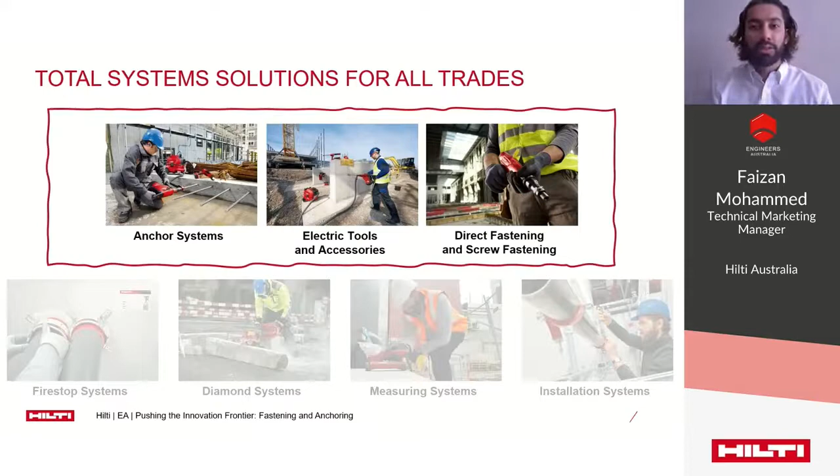The Hilti model is structured to provide an end-to-end partnership from design to installation and maintenance. We support multiple trades with what we refer to as total system solutions for a variety of applications. Today, we will of course be focusing on fastening and anchoring, and the key areas that this relates to are anchor systems, electric tools and accessories, and direct fastening and screw fastening.

Evolution of fastening: whilst it's difficult to pinpoint exactly when the first use of a fastener was, nails used to fasten wooden objects date back to roughly 3400 BC in ancient Egypt. It is thought that the term penny may even originate from medieval England to describe the price of 100 nails.

Until the early 1800s, nails were largely made by hand. During this period, cut nails were made from wrought iron, and about 1860 was when wire nails were introduced. By the 1900s, 90% of all nails were wire nails. Today, we have a variety of nails, produced en masse using coils of metal wiring fed into a machine. But what has changed the most is the equipment that we use to fasten nails.

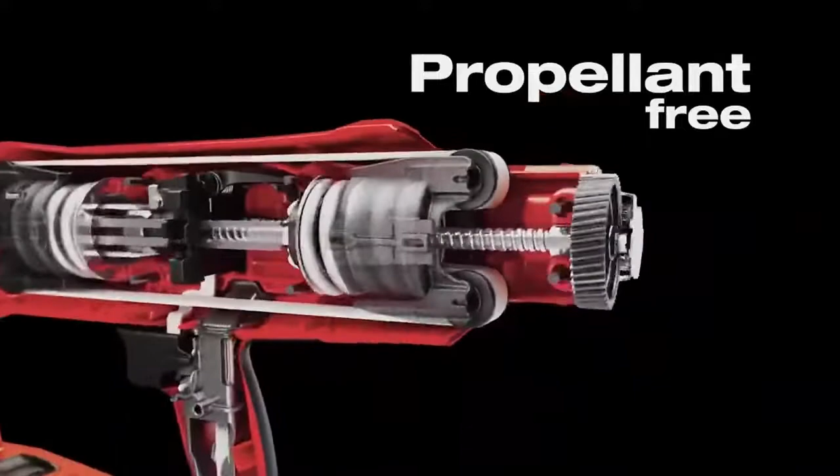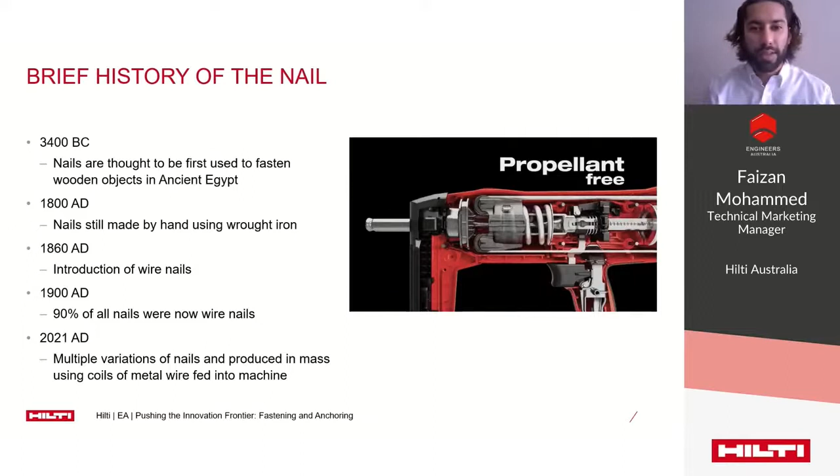The BX3 uses a propellant-free mechanism that exerts low recoil without compromising on fastening quality, achieving a speed of 1.3 nails per second. That's much faster than the traditional hammer.

Screws came later, dating back to 3rd century BC in Greece, where they were commonly used in processing olive oil and grapes. The spiral thread proved effective in producing the necessary force required to perform specific tasks.

Originally, there was no standard to guide the making of screws. Therefore, screws were generally not interchangeable from one application to another, and custom fabrication was required for each specific application.

At around 1800, advancements in technology meant screws were being made more precisely and more quickly. Consequently, the standardization of screw threads became ever important. By the 1860s, the US standard thread was created, and multiple thread designs and forms continued to evolve from there on.

In 1947, the International Organization for Standardization was formed, and one of the first agreed upon international standards was for ISO metric screw threads, whereby the design principles are outlined in ISO 68-1 and characterize each screw thread by M and P. The M designation indicates the nominal outer diameter of the screw thread in millimeters, and P is the pitch, or distance between threads, also expressed in millimeters.

Fast forward to today, we have fasteners of all shapes and sizes, able to take tiny loads of a few hundred newtons, ranging to heavy-duty special anchors like the HDA, which is able to resist loads in excess of 80 kilonewtons. That's 8,000 kilograms, or the equivalent of 8 cars hanging from the ceiling by just one anchor point.

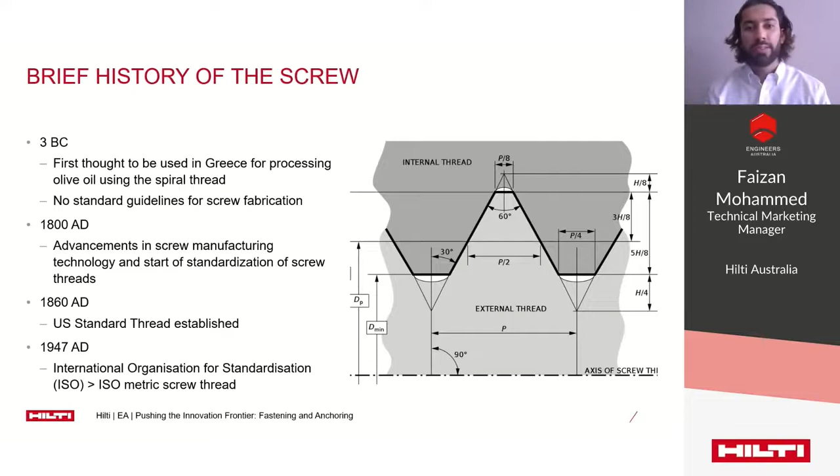So why are fasteners important? Well, buildings are old, and so is the task of connecting building components. Whether structural or non-structural, adequate connection techniques and methods must be utilized to support some of the building's most important components. Put simply, without appropriate fastening, a lot of buildings would just fall down.

This task of connecting building components and members has been handled in different ways and depends on various factors, including building material, required resistance, structural layouts, and other construction requirements.

Traditional joinery in wood construction began with timbers bound with tough natural fibers and the use of interlocking, screws, or doweled joints, amongst other things. Steel construction, which is younger in comparison, has used connections such as cast iron rivets, bolts, and welding, the latter two being the most common today.

Concrete and masonry construction requires other means of fastening and anchoring, and we can explore this further now. Fastening into concrete can be split up into two main types of installation methods. One type is the cast-in installation method, whereby anchoring points can be positioned prior to the concrete pour and then cast in once the concrete is poured.

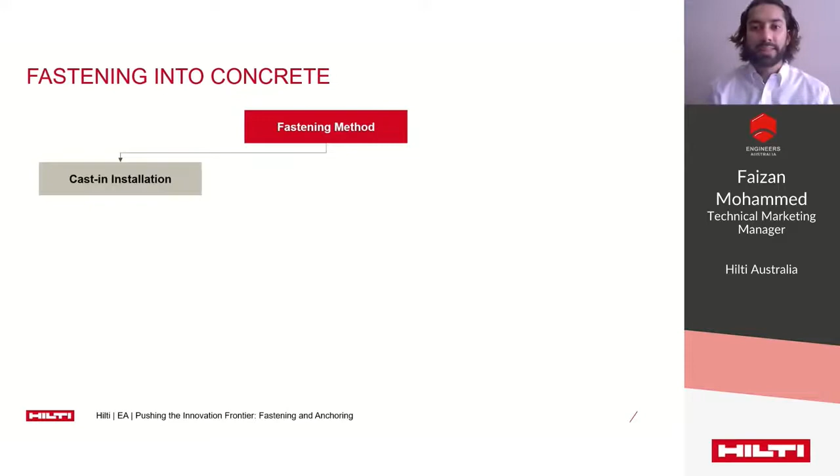Examples include threaded sleeves, channel bars, and headed anchors. Here's what a channel bar looks like. This is an image of the Hilti anchor channel, or HAC.

The other type of installation method is post-install installation. This can be split up further. One type of post-install installation is the drilled installation, which can include anchoring types such as expansion anchors, undercut anchors, bonded anchors, and screw anchors. The HST3 is a type of expansion anchor, and the HY-200-R V3 is used for bonded anchoring.

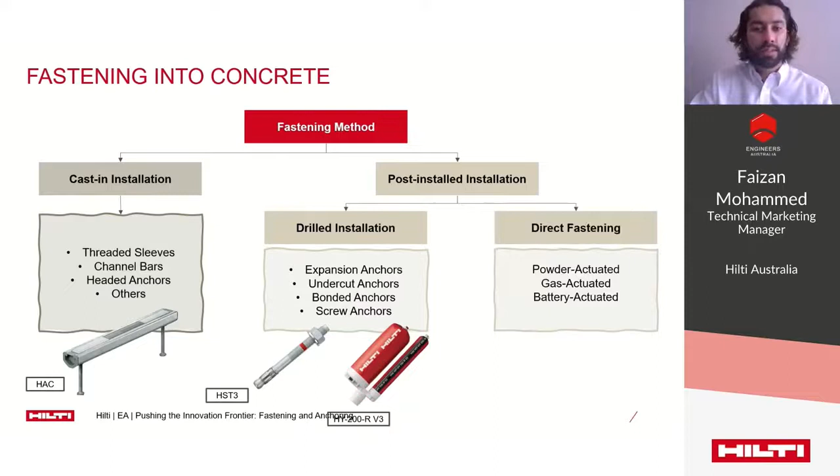The other post-installed fastening method is direct fastening. Examples of direct fastening methods include powder-actuated, gas-actuated, and battery-actuated fastening tools. Here is an example of the DX5, a powder-actuated fastener, and the GX3, a gas-actuated fastener.

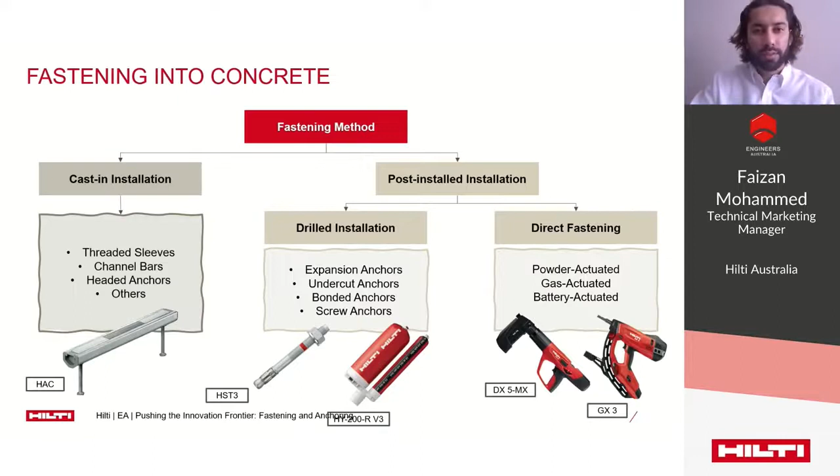So let's dive a little bit deeper into post-installed anchors and their various applications. Post-install anchors enable building components such as steel beams, columns, and brackets to be fixed into existing base material. Some examples include a post to be fixed to concrete, brackets to be fixed into brick, anchoring props for formwork, and doweling into rock.

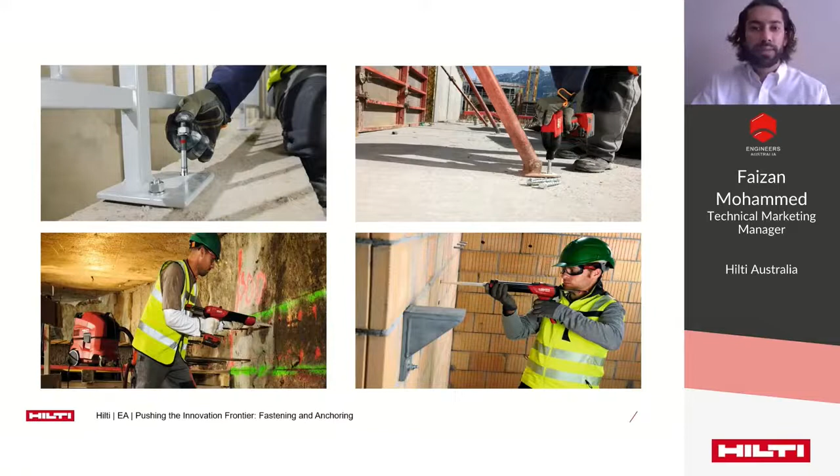The mechanical fastener was the original means of doing these connections. They have been around for over 100 years. With continuous development of these anchoring systems over time, though, we have now got a wide range of anchor types to suit various base materials and applications.

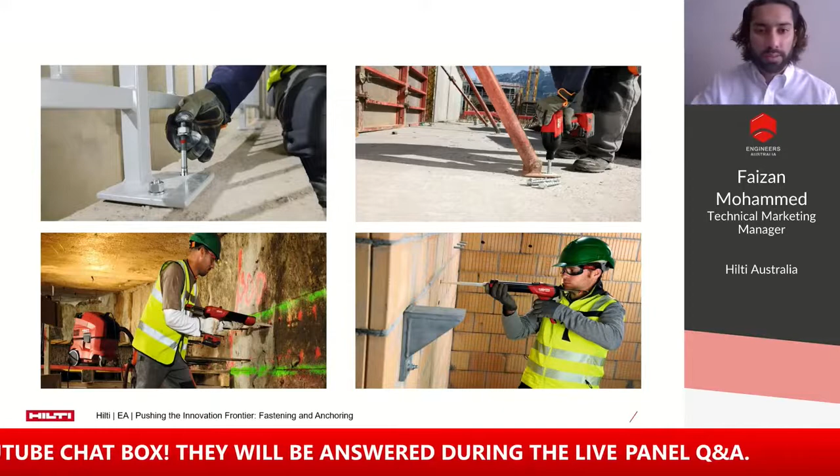Chemical anchoring systems aren't quite as old, being introduced in the market in the 1970s. However, significant investment in research and development has quickly brought them up to speed, and we have today a wide range of state-of-the-art chemical products to suit the full spectrum of base materials and applications.

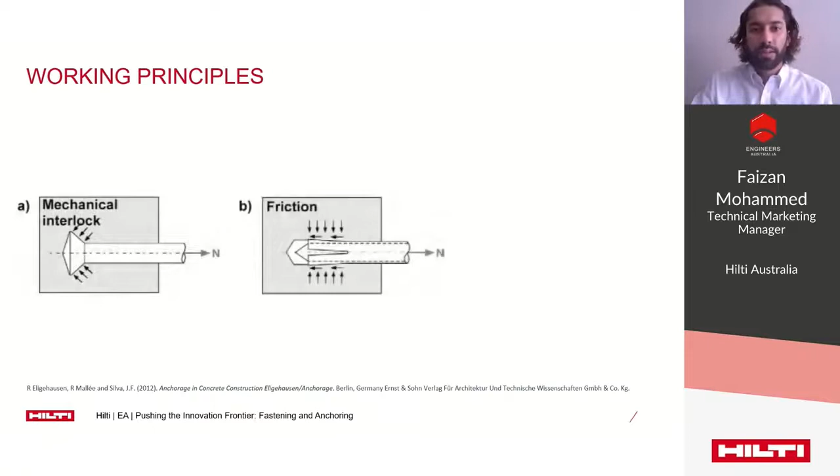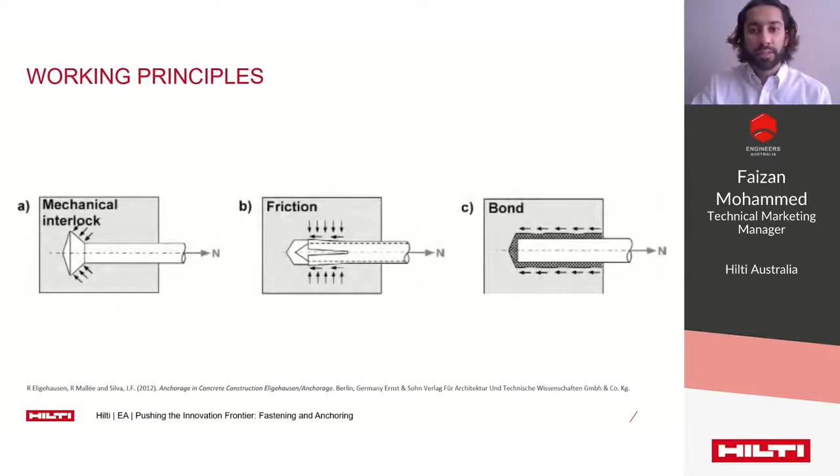To truly appreciate evolution within post-install anchoring systems, it's important to understand the core working principles behind anchor design. There are effectively three different mechanisms or principles an anchor can exercise to maintain fixation once installed. The first is the mechanical interlock, also referred to as keying. The second is the friction hold. Finally, following the more recent introduction of chemical anchoring, an anchor can also be held by creating a bond with the base material. These three working principles, as with any innovation in anchoring, are confined within the boundaries of these principles and the characteristics of the base material.

Let's summarize the different types of anchors and mechanisms. Anchors can be either cast in place or post-installed. Amongst the post-install options, there are mechanical anchors and chemical anchors. With mechanical anchors, they can be further classified depending on their method of transferring load into the base material. The undercut anchor shown here transfers tensile force at the bottom of the drilled hole by direct compression contact, much like a cast-in headed stud. This type of anchor uses a keying effect to create mechanical interlock with the base material.

The mechanical expansion anchor uses friction produced from high expansion forces to resist tensile load. Friction is the most common load transfer mechanism for post-installed mechanical anchors, working by transferring load through friction between the anchor and the wall of the drilled hole in the base material. Anchors that use friction have sleeves which expand during installation. The adhesive anchor, in most cases a threaded rod, transfers tensile force along the entire embedment length. An adhesive bond is created between the anchor rod and the chemical, and from the chemical to the base material. Through this bonding, the load applied to the anchor rod is transferred into the base material through the adhesive.

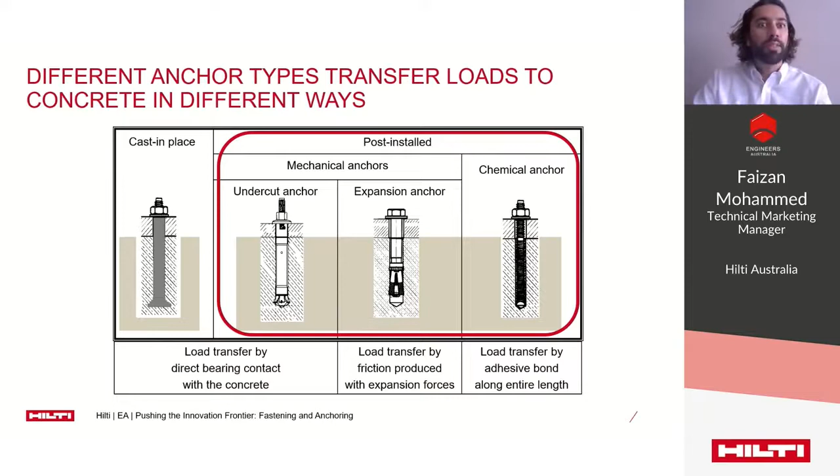Innovations that have changed the fastening industry. Let's take an example of the structural base plate and look at the end-to-end workflow from design to installation through to maintenance, which has a series of steps and activities that may be overlooked at first sight. If we break these up into categories and label the various stages with products, tools, or equipment required, it's clear to see that there is a lot to think about.

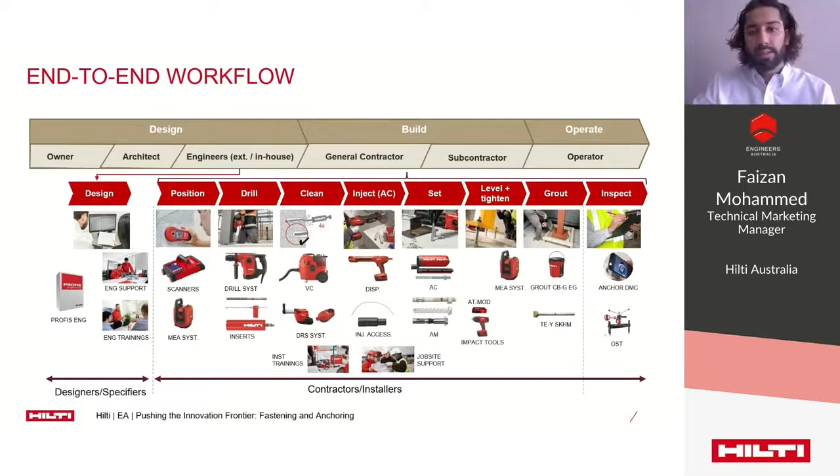The story often starts with the design office, where an engineer will be required to specify an anchor design. During the build stage, the installer will need to identify a safe position for installation and then drill the appropriate holes. They need to clean and prepare each hole, inject or set the specified anchor, level and tighten before grouting, and finally carry out and organize the necessary quality checks such as on-site testing. In the following few slides, I'll go through a few examples of innovative solutions along this workflow.

So let's start with the design office. Our world-renowned and state-of-the-art PROFIS Engineering software was launched 2 years ago in Australia. For the first time ever, designers were able to import loads from the structural design software into Profis and design the complete base plate, including profiles, welds, stiffeners, anchors, and concrete, all on one platform on the cloud.

Furthermore, the added component-based finite element analysis module allowed deeper and more detailed analysis and the ability to see stress distribution visualizations.

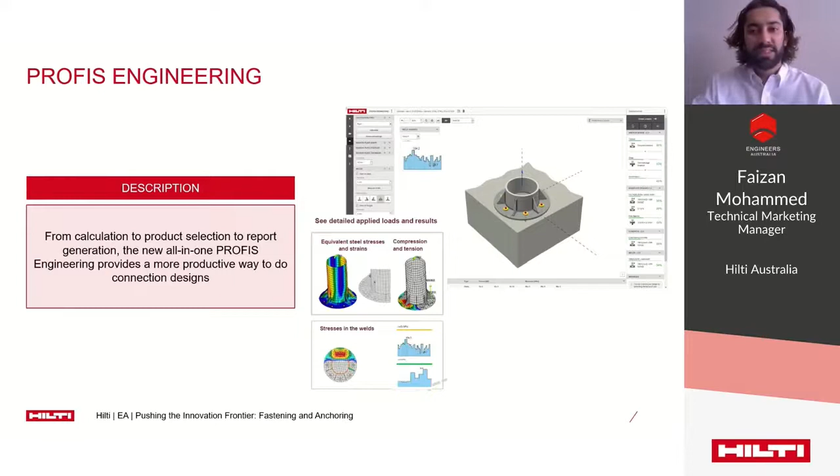Previously, an underlying assumption for the anchor design was to assume that the base plate was sufficiently rigid, and the onus was on the designer to make this judgment. This wasn't necessarily indicative of reality, where base plates can exhibit flexible behaviors. Profis Engineering has changed this and enables a full base plate design inclusive of a flexible base plate assumption.

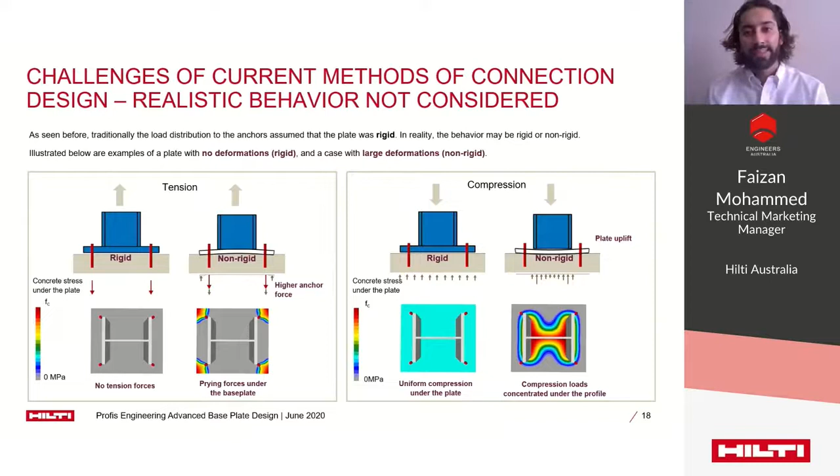Firstly, in tension: when we have a flexible base plate, we can generate prying forces against the concrete at the corner of the plates. This can result in increased anchor loads. Many designers and software take this into account with the addition of prying factors. However, this is often just an approximation or an approximate safety factor used to reduce the pull-out capacity.

In compression, we find we can get a concentration of compression loads underneath the profile using a flexible base plate assumption, as opposed to a uniform distribution of stress as with our rigid base plate assumption.

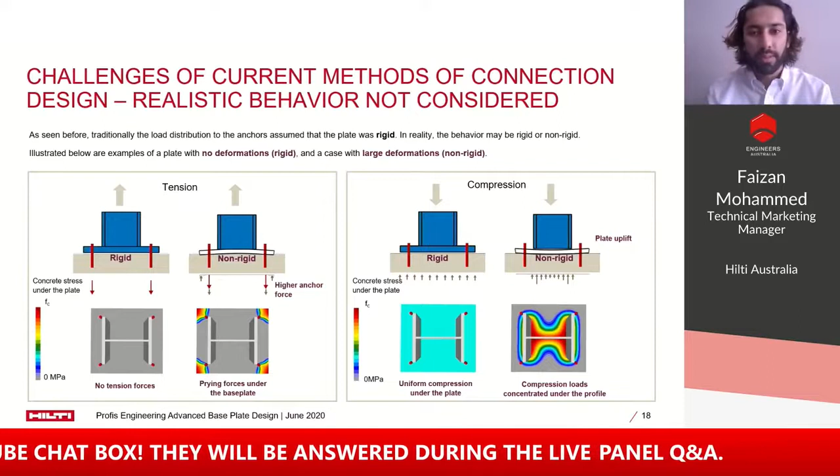Under bending, we can see a combination of tension and compression. We can see prying forces generated at the tension interface of the plate, and we also get a reduction in our lever arm between our tension and compression regions, both of which result in increased anchor forces.

Now, if we want to start looking at the realistic behavior of a connection, we can no longer just consider the anchors and the plate alone. The behavior is affected by all components of the connection, including the profile, stiffeners, the welds, the base plate, the anchors, and the concrete itself.

As mentioned, in order to model the realistic nonlinear behavior of our connections, we can use component-based finite element methods, or CBFEM, which individually models each connection component and connects them all together in the global model.

We model the concrete as compression springs with material properties taken from AS3600. The steel is modeled with 2D quad and tri shell elements with a bilinear stress strain curve. These elements are automatically meshed and automatically refined around the anchor nodes to a refinement level optimized to achieve a convergent solution. This is why the model can be calculated so quickly.

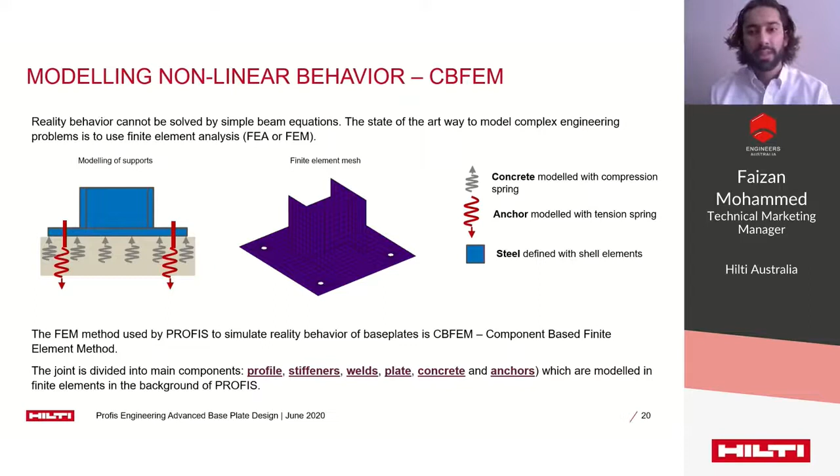The anchors themselves are modeled as bilinear tension springs. The stiffness of the anchors is unique on a per anchor basis and has been determined through hundreds of Hilti's own internal testing to determine this critical data, as the anchor stiffness can have a significant impact on the overall design.

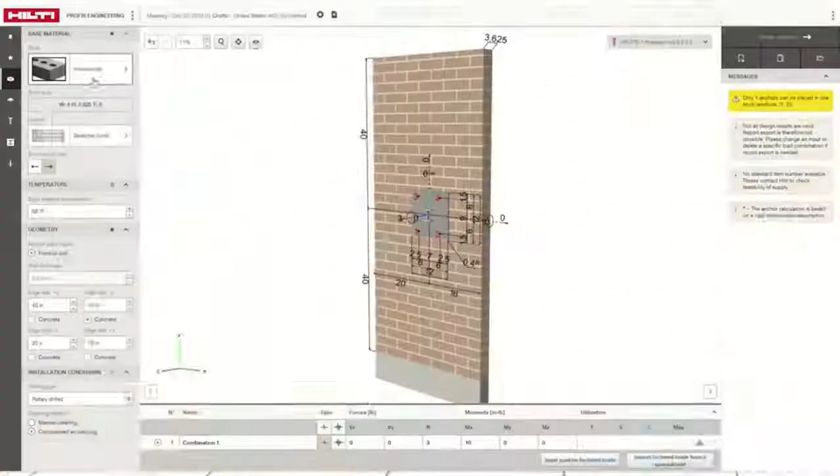One of the big features we added is expanded our base material offerings. We now have concrete, masonry, and concrete over metal deck.

We've also added what we're calling our load engine. This is a set of features that gives you more options to import the loads into the model and design what you really have in the field.

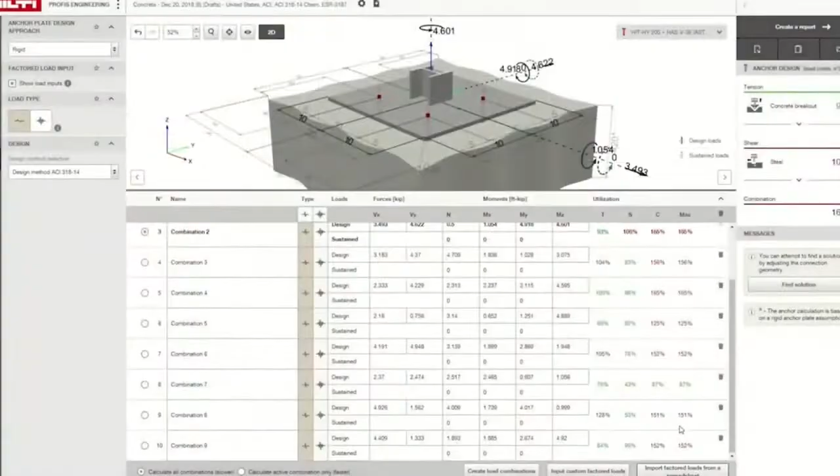And the last feature that we've added is true base plate design. We have two new modules: one is an AISC Design Guide 1 second edition module, and another is a finite element analysis.

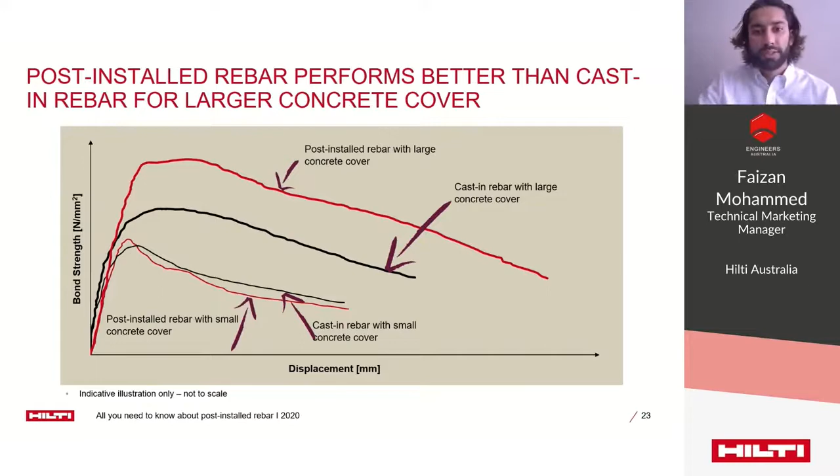On the contrary, for larger values of concrete cover, the post-install rebar with Hilti's mortars has a much higher bond strength, as demonstrated by the top red curve. The following video demonstrates how this can be useful in practice.

Extending walls, slabs, and columns can be complex and labor-intensive. In this example, we need to extend the existing wall by lap splicing new rebar into the existing structure. To lap splice the rebar requires a deep embedment with a large overlap, and this can be a challenge.

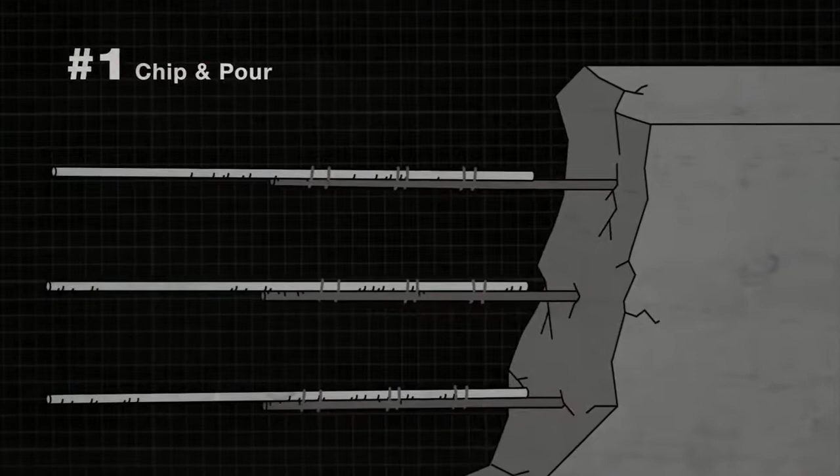Current solutions for this application are generally done in one of the following ways: chipping away the concrete to expose the rebar, tying in new rebar, and pouring new concrete; using a diamond core drill to core out large holes close to the existing rebar and then grouting in the hole; or getting rid of the entire existing structure and starting from scratch. These methods can be costly, time-consuming, and labor-intensive.

The International Building Code now allows anchor manufacturers to qualify chemical anchor systems for post-installed rebar. This helps to ensure that products and installation techniques used perform properly for the application.

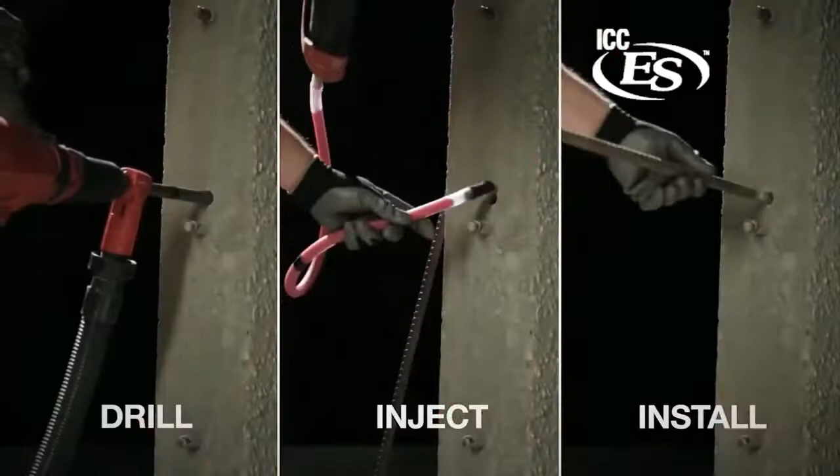Hilti introduces the industry's first solution for embedments required for lap splicing and developing post-installed rebar using chemical anchors that are faster and easier to install, as well as ICC approved.

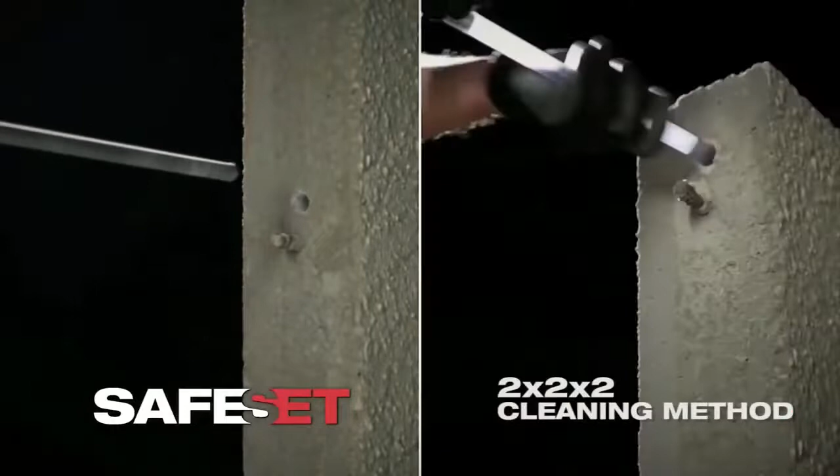Contractors can now do lap splicing applications by drilling a hole, either with Hilti SafeSet installation methods, which require no hole cleaning, or using standard drilling and hole cleaning methods.

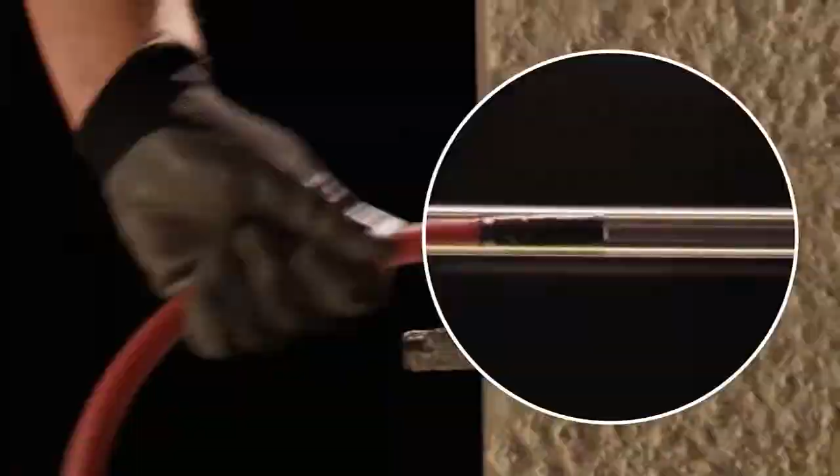Once the hole is prepared, inject the adhesive using Hilti's best-in-class installation accessories, which include the HDE battery dispenser and piston plug. The piston plug helps properly inject the adhesive evenly without creating air voids to help ensure full performance.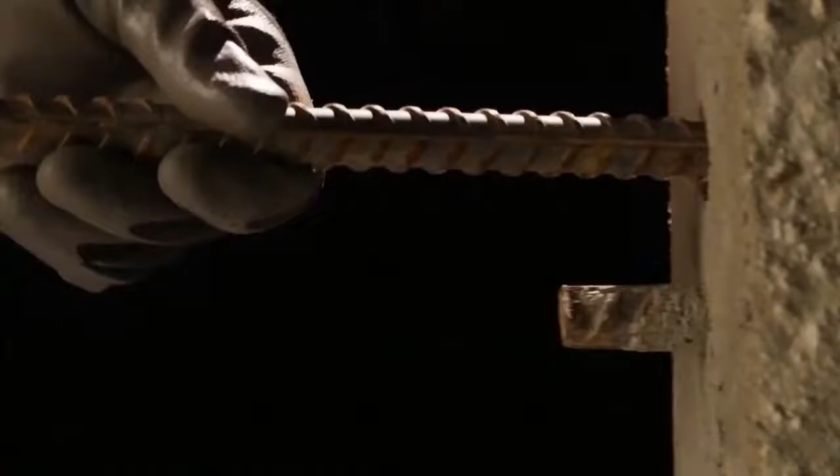Extend walls, slabs, and columns faster and easier with the industry's first qualified post-installed rebar system.

Another innovative chemical solution is the HVU2 capsule anchor, the second generation in its range. This one has been designed to maximize productivity and simplicity of installation by removing time-consuming steps such as hole cleaning and chemical injection. The capsule chemical anchor boasts near instant loading and supreme bond strength.

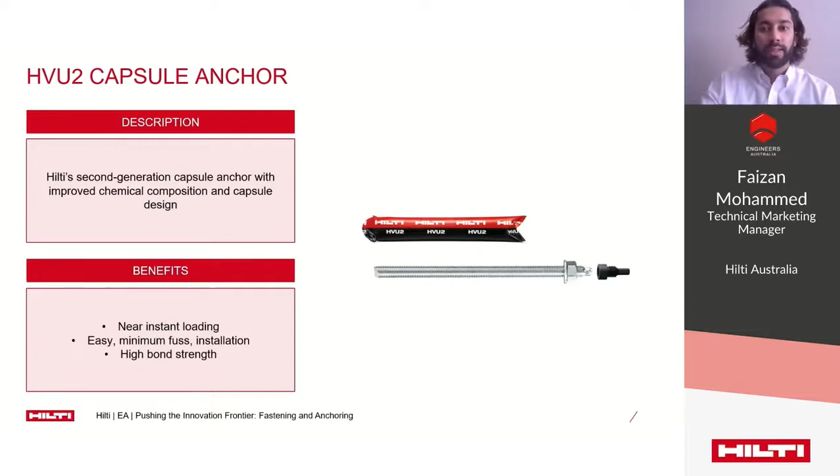The following video shows exactly how easy installation can be. Have you ever dreamed of a fastening system with the versatility and high performance of an adhesive anchor, but with the benefit of almost instant loading like a mechanical anchor?

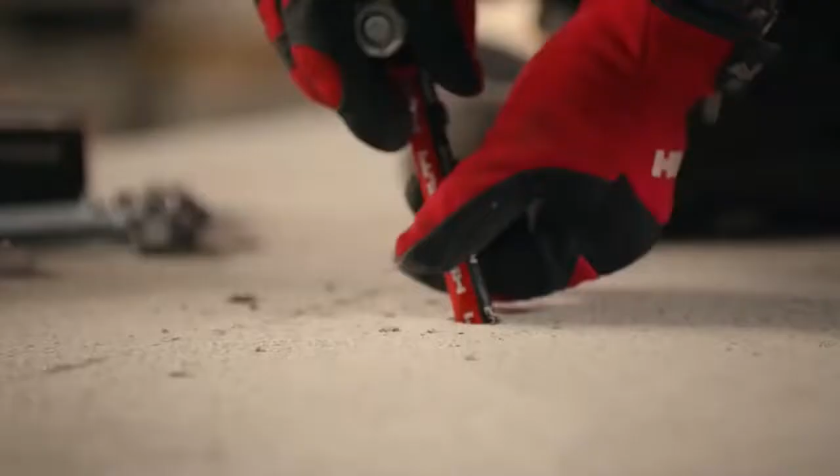The Hilti HVU2 is the next generation of capsule anchors, which combines the advantages of adhesive anchors and mechanical anchors. With its unique design as a foil capsule, the HVU2 is virtually unbreakable and allows for easier handling and transportation.

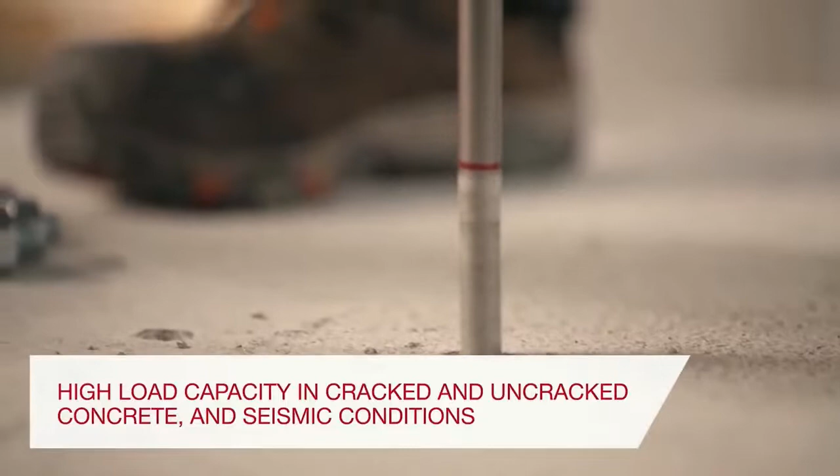The HVU2, in combination with threaded rods, provides high load capacity in cracked and uncracked concrete, as well as in seismic conditions, even in diamond cored holes.

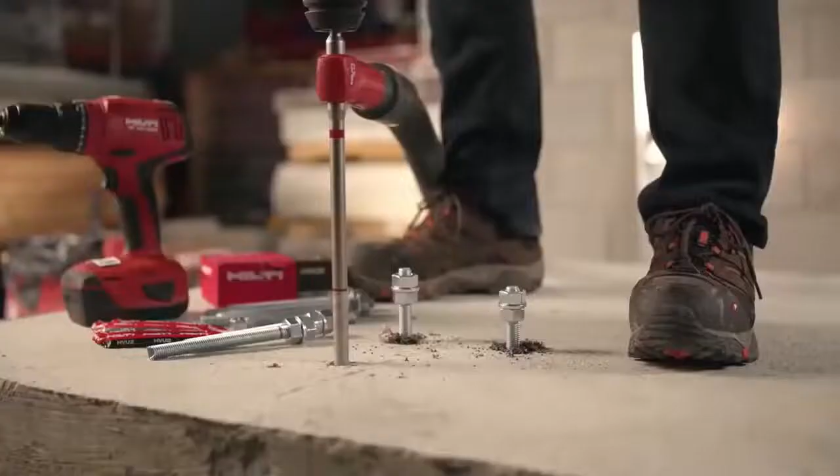When used with the Hilti SafeSet system, the holes are drilled with a Hilti hollow drill bit and Hilti vacuum cleaner, making the installation virtually dust-free and OSHA 1926.1153 Table 1 compliant. All of that is covered by an ICC report.

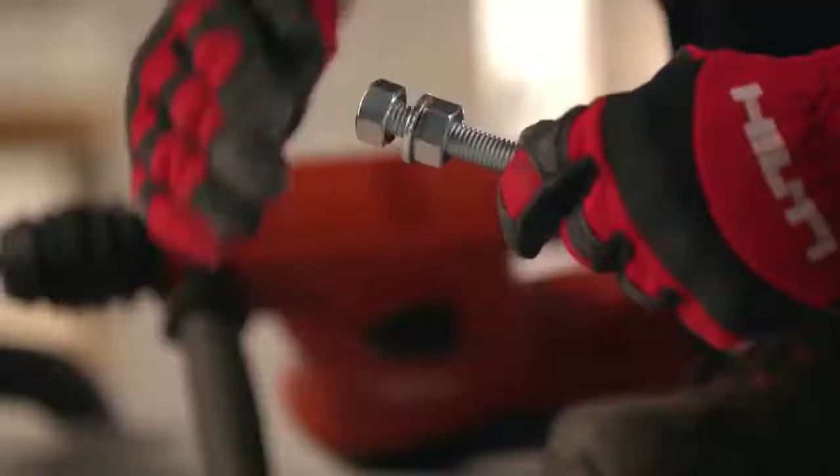The HVU2 works best with Hilti HAS rods, which are available in a wide variety of steel grades and sizes. A simple drill driver is sufficient to set the smaller rods up to 5/8 inch diameter in seconds, helping to ensure the right amount of adhesive is applied without any waste.

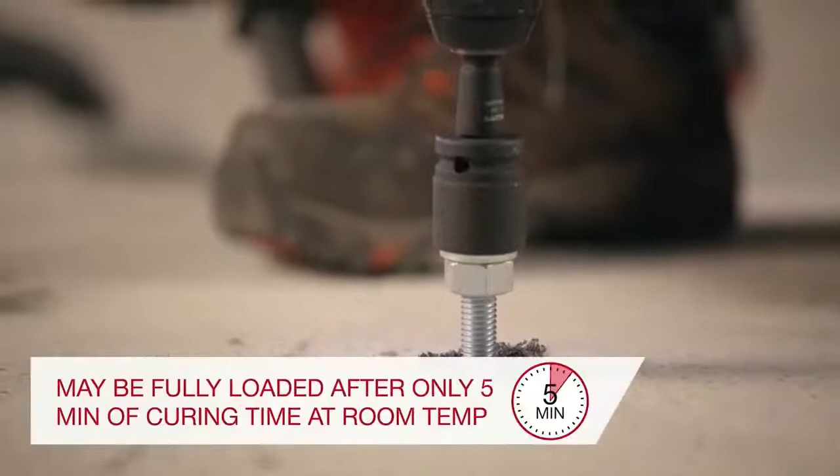The fast curing time of only 5 minutes at room temperature allows for almost instant loading and completing your fastening job without long waiting times.

That video mentions seismic approvals, and on that point, it needs to be understood that anchor performance under static conditions and seismic conditions is quite different. First of all, the load applied is different. Static load is a consistent loading on the anchor, whereas in seismic conditions, the anchor will experience dynamic or cyclic loading. Also, due to the seismic action, the assumed uncracked concrete would likely be cracked.

We will see more cracks develop in seismic conditions. The width of the cracks generated during earthquakes is greater than those resulting from static loading and can easily reach a width of up to 0.8 millimeters, while in static conditions cracks are normally restricted to a width of 0.3 millimeters. Seismic actions also result in the opening and closing of cracks in combination with the load cycling on the anchor.

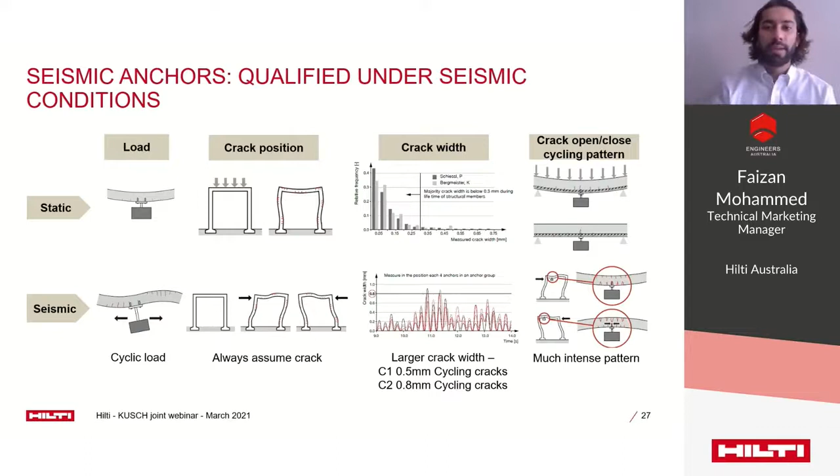Based on this, it is evident that seismic events have a bigger impact on the loading and behavior of anchors. As such, anchors designed for static conditions may not be suitable for seismic conditions. Specific tests are required to assess the suitability of anchors under seismic loading, since they have to cope with alternating shear and pulsating tension forces, as well as moving cracks at the same time. The HST3 anchor is an example of an anchor which has been subject to rigorous seismic evaluation and has achieved a seismic C2 rating. The following video explains further.

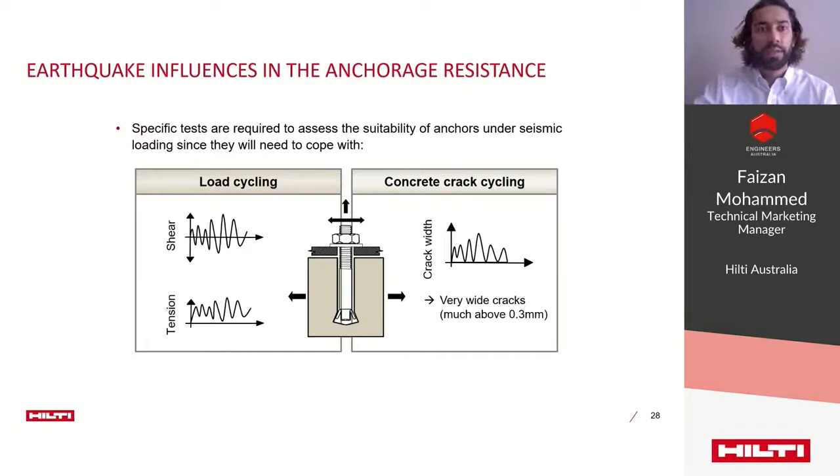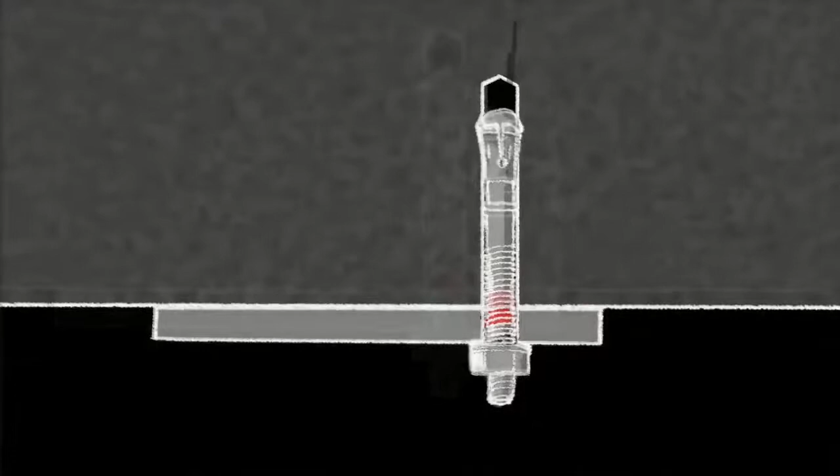Design under seismic conditions is only completely possible if there is a solution approved for its fastening. Presenting HST3, the new metal expansion anchor which provides the added benefit of a crack retraction effect and delivers perfect load displacement under seismic loading. Seismic means crack cycling and load cycling by means of tension and shear forces acting on the anchor, while cracks in the concrete member are opening and closing.

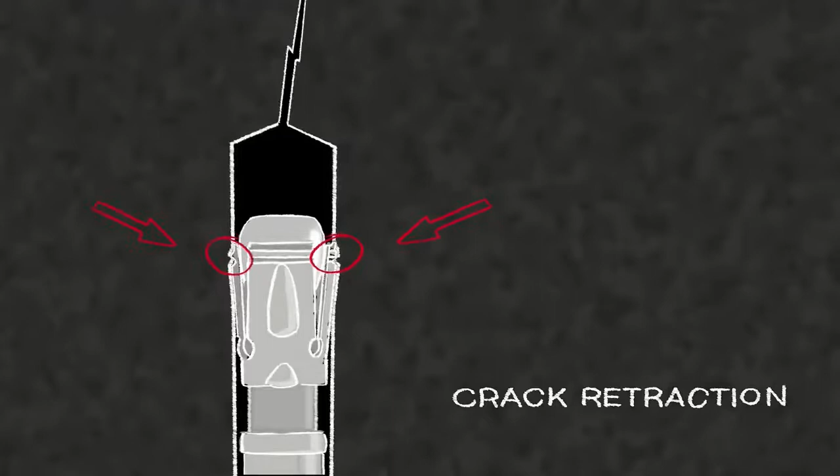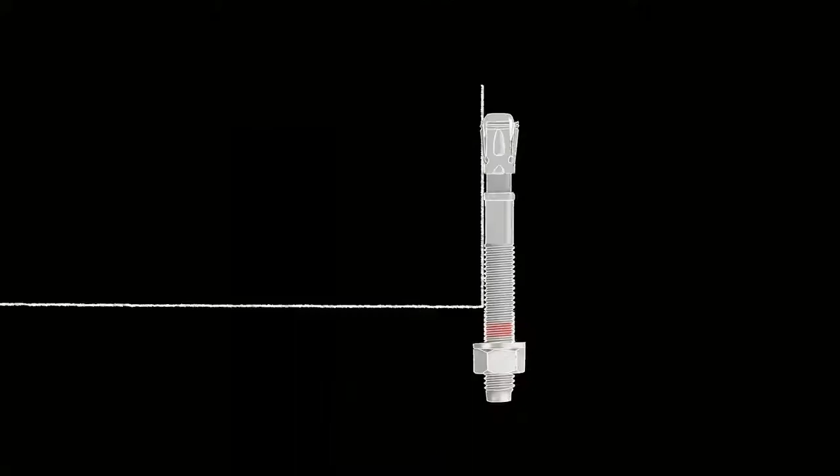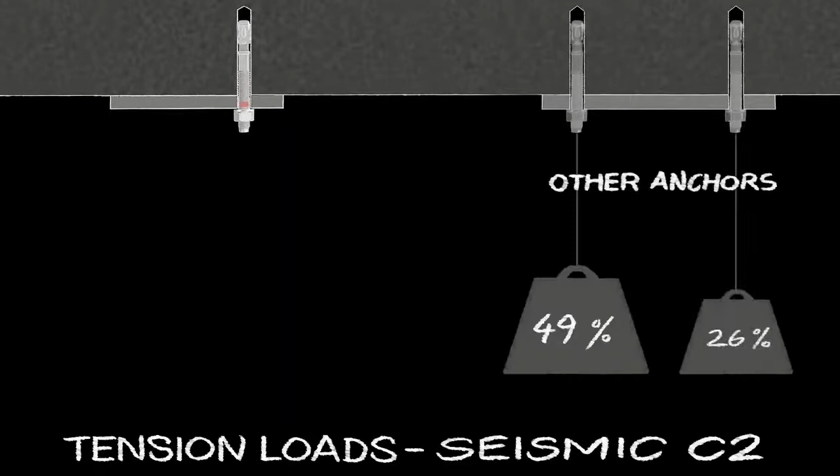The crack retraction effect ensures that the sleeve keeps its position in case of seismic cracks. While the crack closes, the cone is pushed back to its original position. Crack retraction is achieved by a balanced interaction of the ingenious sleeve, premium bolt material, and optimized coating, leading to the highest tension resistance values under seismic C2 category.

Switching gears again from anchors to installation, Hilti recently introduced its first robot, the Jaibot. It's a semi-autonomous mobile ceiling drilling robot. The Jaibot helps MEP installation contractors tackle productivity, safety, and labor shortage challenges. It executes its tasks based on building information modeling data. The robot is a completely cordless and easy-to-use system that doesn't require expert skills.

It locates itself accurately indoors, drills the holes, which are dust controlled, and finally marks them according to the trade. This is what makes the solution ideally suited for the mechanical, electrical, and plumbing trades. This BIM-enabled robotic solution also makes the construction process more transparent, with improved execution speed, constant performance, and fewer errors. Daily progress can be reported from the field to the project via cloud computing, and potential conflicts between trades can be detected early and limited, resulting in more projects being delivered on time and within budget.

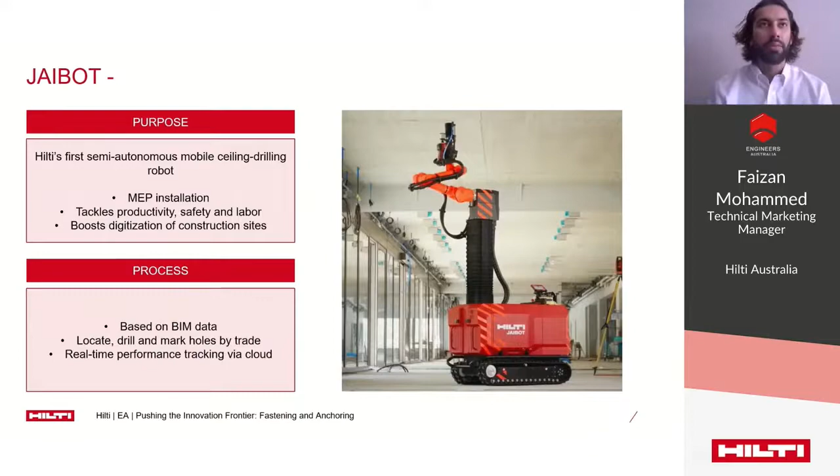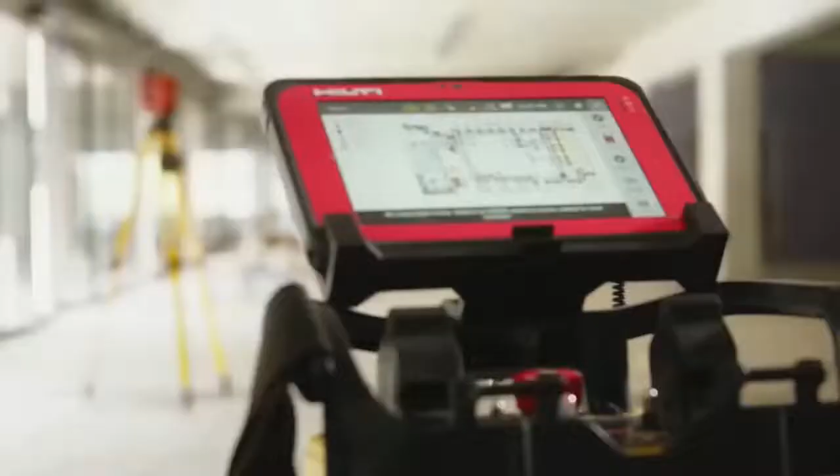At Hilti, we strive for change. Around the world, our innovations have shaped how work is done on today's job sites. Today, our ambition remains as strong as ever, to drive productivity through innovation. With BIM, we've already entered the age of digital planning. What if we could use the same data to not only streamline processes, but simplify trade collaboration and automate repetitive and strenuous tasks? Now our vision becomes reality.

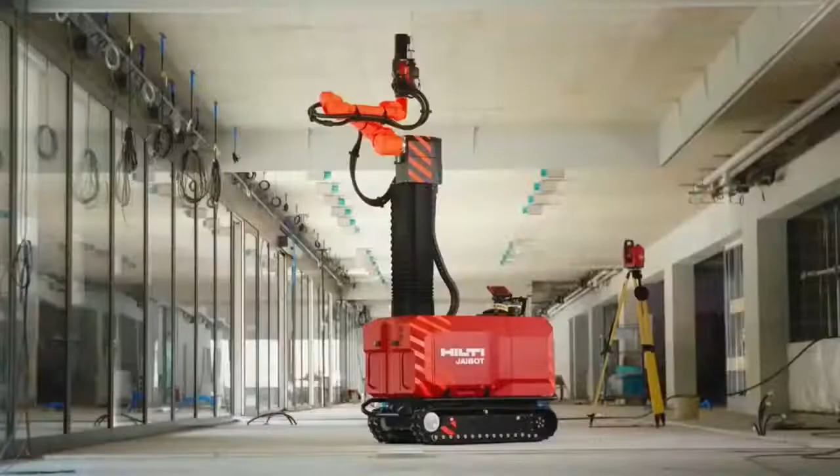Introducing the Hilti Jaibot, a semi-autonomous drilling robot for ceiling installations, helping you to deliver MEP projects on time. Let's not wait for the future to come. Let's shape it together.

So that was the Jaibot, and switching gears again, just on a final note on risk mitigation. We've seen a number of innovations and changes in fastening throughout the presentation, many of which tackle either safety, productivity, or quality. A combination of all these innovations together with adequate education and training can help mitigate risks for both designers and contractors. When it comes to anchor design, you must ensure you comply with the NCC requirements.

Software such as PROFIS Engineering can help you to do so. It's also vital that designers provide adequate, specific, and detailed information on drawings through good specifications and general notes that include inspection and anchor testing requirements. A good specification with specific product details can make a world of difference on site.

From an installation perspective, some of the most critical causes of anchor failure include poor hole cleaning, poor injection, over or under torquing, and incorrect sizes for mechanical anchors. That's why it's important to get an expert opinion and make use of the latest innovations in anchoring systems such as the HSL4B or AT module to further reduce these occurrences.

However, most important is education, training, and partnership with experts. We have a dedicated team of over 30 engineers across Australia who are committed to partnering with you and ensuring optimized solutions every single time. So please don't hesitate to get in touch and use the Hilti resources and expertise that you have available at your disposal.

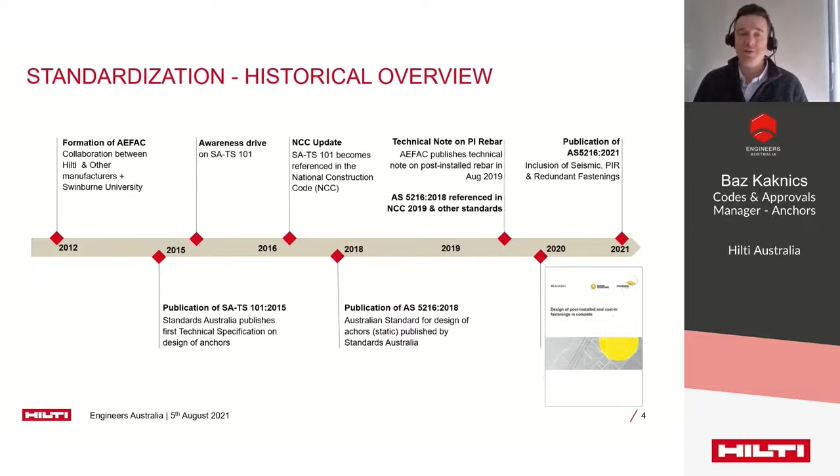With the next slide, I'd like to explain why having developed our own comprehensive national standard is an important achievement and how much it brings in terms of risk mitigation and safety. So basically, AS5216 stipulates mandatory requirements for the qualification and design of anchor products, as well as makes recommendations for the installation by referencing the AEFAC installer training. The goal of product pre-qualification is to ensure that fasteners are assessed by an independent third-party laboratory and found to be fit for purpose.

Upon successful assessment, the product is awarded a technical approval, typically what we call an ETA report, which is the prerequisite for any safety-critical application. During design, the connection must be verified by the design engineer following the formulas from the standard, and obviously the adequate reduction factors must be applied to ensure the right level of safety.

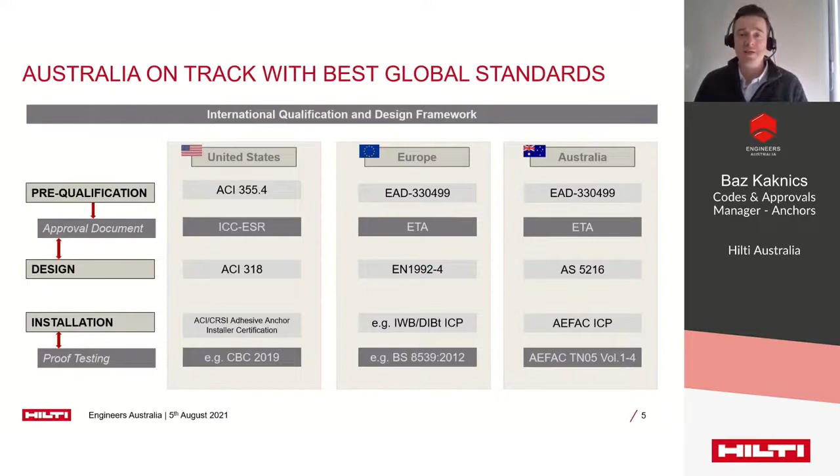For the installation, ideally we want to see installers being trained by AEFAC, or alternatively by the anchor supplier at least. Another good practice is to carry out proof load testing after the anchors are set, especially for safety-critical bonded anchors. Proof testing can usually effectively reveal any installation mistakes, such as poor hole cleaning or inadequate drilling practices. AEFAC has developed relevant guidelines for this purpose, and you can find these on the AEFAC website under Technical Note 05.

In this webinar today, obviously we are focusing on innovation. And if you know Hilti, then you probably know that innovation is really at the heart of everything we do. It's always been the driver behind our technologies, software, and services. Although we also own our own research and development centers in multiple countries, we like to work closely with partners from leading universities and independent laboratories around the world as well.

Our aim is to enable a strong collaboration between academia and industry through a basically practical approach. And by practical, I mean that we want to be able to tackle challenging technical problems that the industry faces day by day. All the expertise we gain through research is then incorporated into our products and services so that we can achieve safer, faster, and hopefully more daring builds.

Naturally, it's one of our objectives to offer extensive support and partnership for research and education here in Australia too. For example, Hilti, together with Swinburne University, has recently joined a local initiative called the SmartCrete CRC, and testing of fasteners will soon begin under this program in special base materials like fiber-reinforced concrete. Over the next few slides, I will demonstrate the true potential of university collaboration with a compelling example.

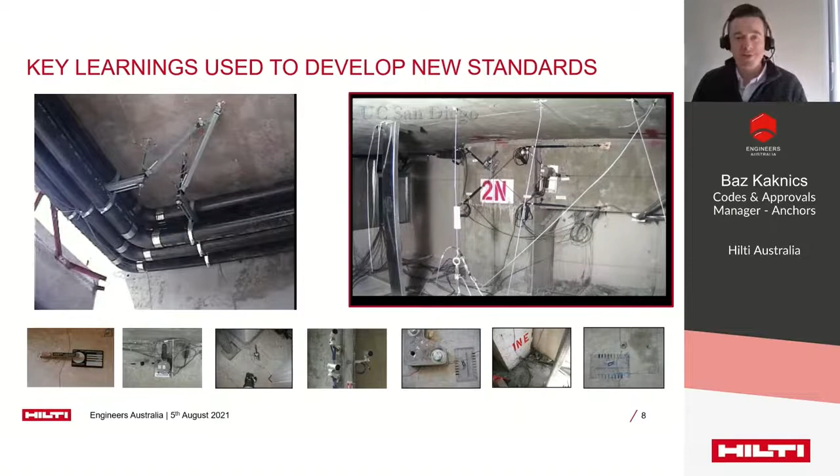Hilti was heavily involved in this project, and you can see some of the Hilti installation systems in action during the earthquake simulation here.

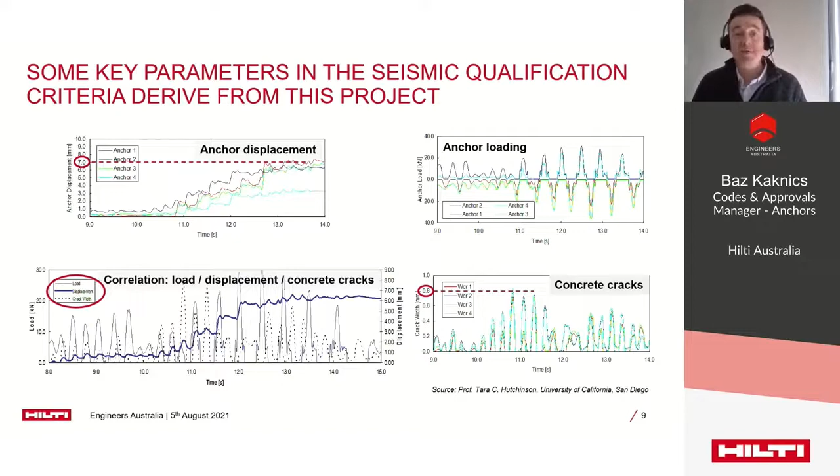Many of the key parameters, such as the anchor loading protocols, displacements, and the concrete cracks, were closely monitored and recorded for analysis, and it was shown that there is a very close correlation between these 3. The largest concrete cracks, for example, were in the order of 0.8 millimeter, measured outside the plastic hinge zones, which was shown to significantly affect the anchor performance and therefore has to be included during the qualification testing of the anchors.

Beside our partnership with universities and industry associations, we make significant efforts to invest into our own in-house R&D. We aim to allocate more than 6% of our turnover into research and development every year, and around 1,500 of our colleagues are involved in this work worldwide.

What gives us an edge over our competitors is that we can rely on our development centers all over Europe, America, and Asia. This enables us to launch approximately 60 new products each year, with currently more than 2,000 active patents registered under the Hilti badge.

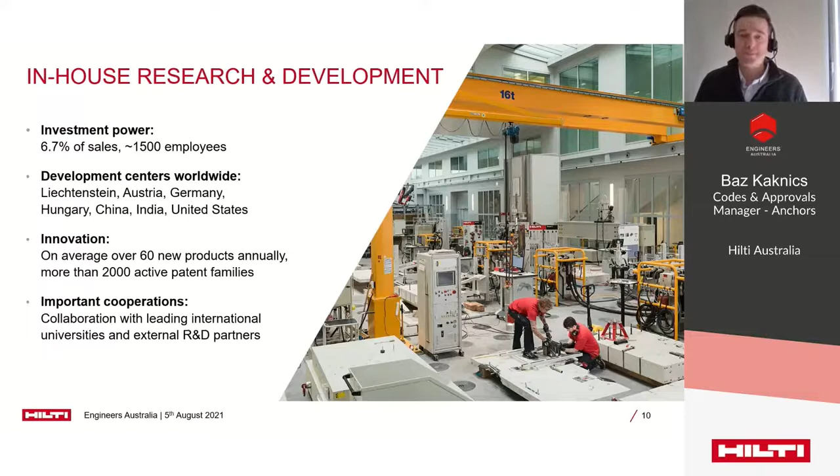Here you can see our latest research and innovation center, opened in the middle of the Swiss Alps back in 2015. Under one roof, on a total area of some 30,000 square meters, the Hilti Innovation Center provides space for approximately 400 employees who are directly involved in research and development.

The idea behind the Innovation Center was to create an open and inspiring space to help our colleagues turn their creative ideas into marketable products. The new facility is equipped with state-of-the-art testing machinery, similar to the ones I showed before. This enables us to develop new generations of safer and more efficient fastening products for the building industry.

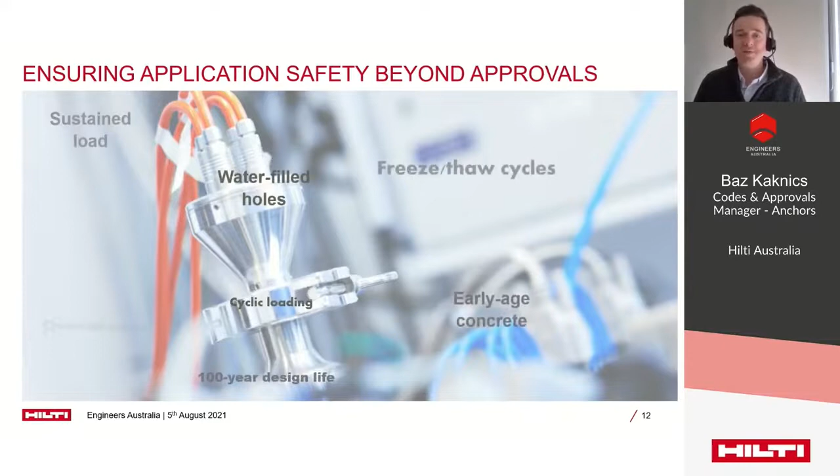In the previous slides, I talked about the importance of pre-qualification and product approvals to ensure that the fastener is fit for purpose. To give you some idea about the exact number of tests required to qualify one anchor product, it is often in the several hundreds, if not up to 1,000, before the certification badge can be placed on the box of the product.

Therefore, before we send away any new products for a third-party qualification, we make sure that we tested everything in our own labs to the same or even higher standards.

Finally, we find it important to constantly share some of our research and expertise with the engineering community, which we do through various platforms. For example, we aim to regularly publish in technical and scientific magazines and present during local industry events and conferences.

For instance, we work together with the various technical societies of Engineers Australia. Two recent examples are our conference papers presented at the Australian Earthquake Engineering Society, which was an online event, and another example is the conference recently held in Melbourne with the Tunnelling Society of Australia, where I also presented my conference paper about the durability of chemical anchors.

With our local team of 30 engineers, we also offer tailor-made technical presentations to our engineering and design partners. So please feel free to reach out to us if you'd like to organize a seminar or lunch and learn event within your organization.

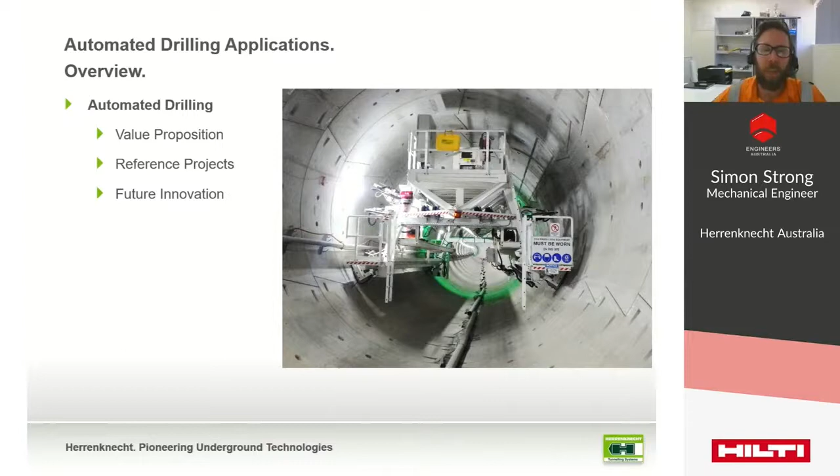Today I'll be discussing with you a value proposition, how we evaluate a suitable automated drilling application, three reference projects, Australian applications highlighting the advancement of drilling equipment, and future innovations, industry adoption of innovation and technology, and future development for automated drilling systems. So let's get started.

A large quantity of holes to drill in a highly repetitious pattern. I also consider a good partnership with the customer an essential requirement, as these large-scale projects are not copy-paste, will have unique specifications and involve many interfaces. So a good partnership is important in targeting a common goal.

With these essential requirements sorted, a discussion on drilling automation usually follows with the scope of drilling to be undertaken and the required production rate.

Early consideration will be given to the type of vehicle intended to carry the drilling equipment, self-propelled or carried on a flatbed truck, for example. Finally, planning is required for the machine installation requirements, how it is installed in position or moved between different parts of the project.

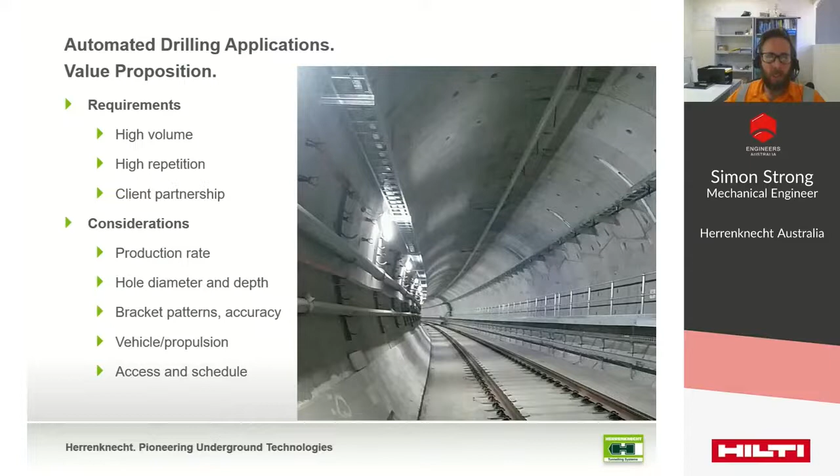The value proposition for automated drilling applications should consider cost, time, quality, and safety. The end goal for any high volume drilling project is to complete the work at a high rate of production and minimize costs while delivering a quality result with a high level of safety to the work crew.

A high production rate requires work to be happening efficiently and in parallel. Drilling rigs are normally designed so that one operator can be simultaneously drilling many holes. Fewer workers simultaneously controlling multiple hammer drills reduces the labor cost per hole. Simultaneous drilling equals high rate of production.

Quality for drilled holes is measured by positional accuracy, hole pattern dimensional accuracy, and perpendicularity of the hole to the wall. Drills rigidly mounted in accurate positions and aligned and guided mechanically provide such highly repeatable results. We've developed a design for guiding the drill bits to ensure we maintain the hole pattern dimensional accuracy without overstressing the hammer drill chuck.

OHS risks exist for handheld percussion tools, and often this limits operator trigger time for handheld drilling. For large diameter holes, the drills can be heavy, so ergonomics is important, particularly for overhead drilling. Drill rig operators are not required to manually handle the drills, so are not limited by trigger time, and will not fatigue from repetitive overhead drilling.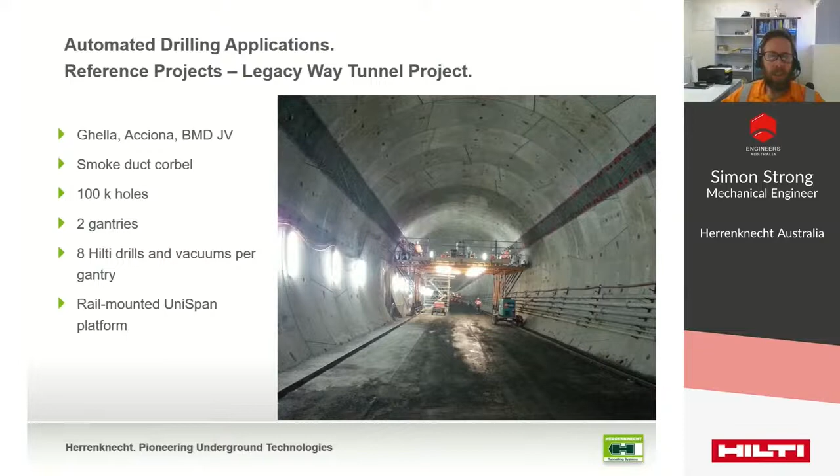You can see the scabbled concrete, and the red painted squares are the drilling windows. Such a repetitive linear application is highly suited to automation.

The configuration of the Hilti hammer drills for the corbels was a single drill per position. Efficiency was gained then by having one operator control between 2 to 4 drills simultaneously.

Some sections of the tunnel had a lot of steel reinforcement. To prevent wastage of drill bits, stroke sensors were installed on the actuators to enable a timeout function to retract the drills if the bit did not reach full depth within a defined time. By not allowing drills to labour on reinforcement, drill bit life was maximised and operators could confidently manage multiple hammer drills at the same time.

The platform provided great access for operators, supervisors and engineers. This project hit its targets and was highly successful. The drilling technology was reasonably simple and made an otherwise arduous task very industrious.

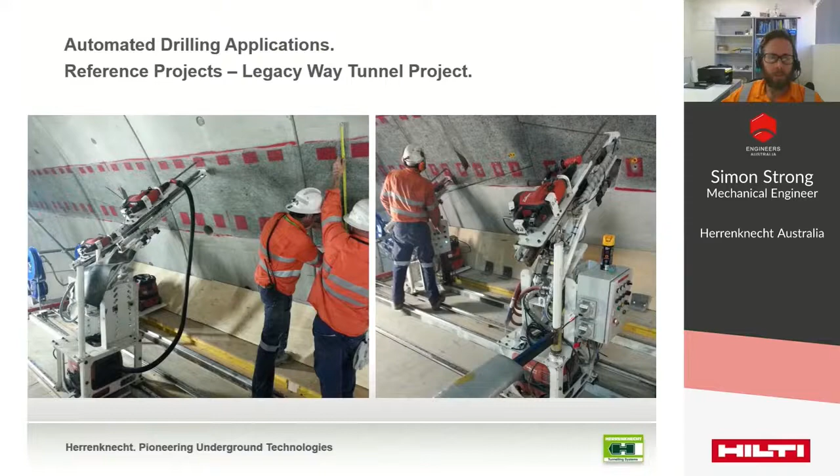The Sydney Metro Northwest project is a 30-kilometre rail project and the first stage of Sydney's new integrated rapid transit system. The IJV provided the track, service walkways, overhead works, and other infrastructure type elements in the fit out. And the other joint venture, the SJV, was responsible for the design and delivery of the tunnel systems, rolling stock, rail signalling, and overall control systems.

Combined, the two JVs were required to install more than 240,000 anchors in the tunnel segmental lining for a complete M&E fit out. IJV and SJV had 2 drilling gantries each, with a target performance of 100 metres per day, which was comfortably achieved. For this project, the drills were mounted on custom self-propelled gantries.

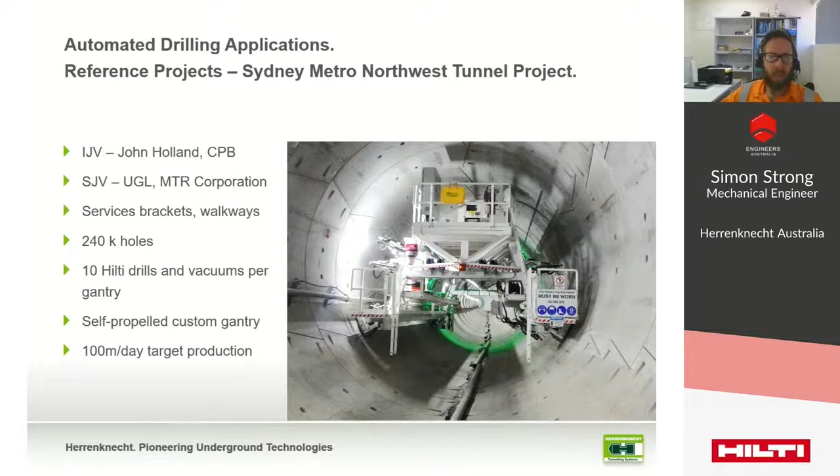New features developed for the IJV and SJV drilling gantries were firstly the self-propelled gantry, driving on rubber wheels on the tunnel lining and designed for light vehicle through access underneath. It had arrays of drills mounted in bracket patterns with drill bit guidance for the dimensional accuracy. It had touchscreen controls to allow the operators to adjust auto cycle timers and display machine feedback and maintenance information.

On the next slide, I'd like to show you a short video of an array of 4 drills completing a cycle and automatically retracting from the tunnel wall, which I think highlights the efficiency and accuracy of the system, as well as the cleanliness of the Hilti dust removal system.

A set of 4 drills advances into the wall until it reaches the depth and then will retract automatically.

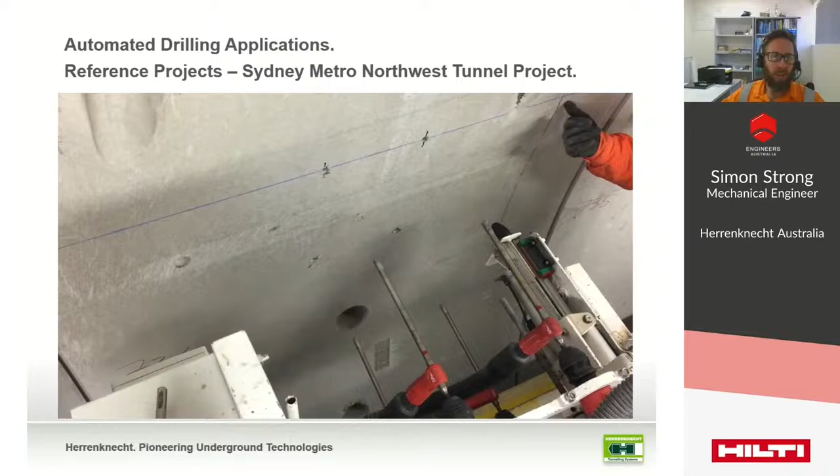The most notable successes of this project were that both the IJV and SJV crews achieved over 300 metres of drilling on some days, tripling the anticipated production rate. And the Hilti automatic dust removal system worked perfectly for such a safe and clean environment, as sort of demonstrated in the video.

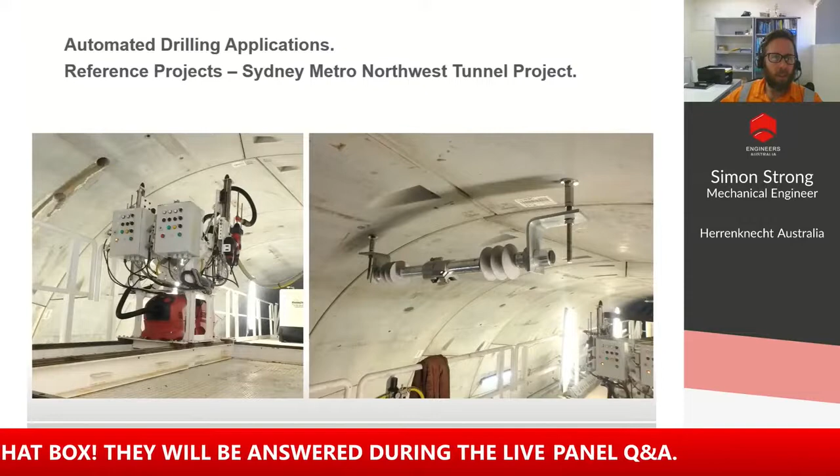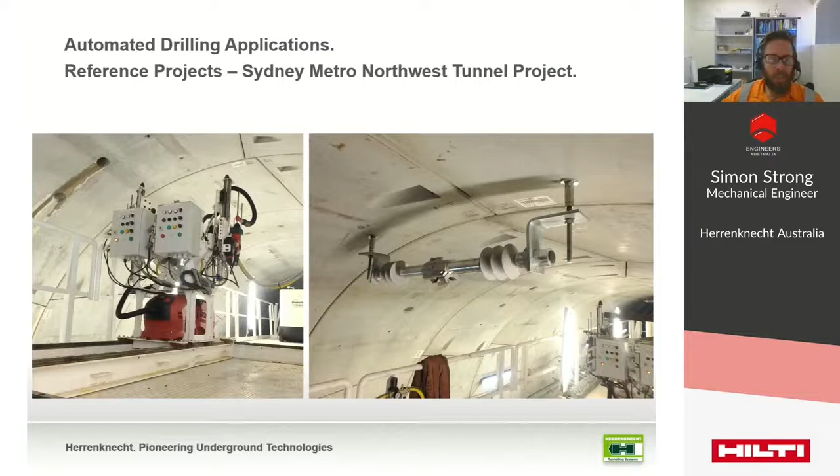On the IJV gantry, the overhead conductor rail brackets shown here were drilled and installed from the drilling gantry. This was highly beneficial to the project to not have to access the top of the tunnel again for this activity.

The final project I'd like to show you today is the second stage of the Sydney Metro project, City and Southwest, which is another 30 kilometres of rail tunnel from Chatswood in the north, under the harbour, through the city and out to Marrickville. The delivery of the rail systems and infrastructure fit out was by Systems Connect, a joint venture of UGL and CPB.

The drilling volume on this project is approximately 200,000 holes. There were many new requirements introduced for this system. The self-propelled gantry system was required to operate both on the tunnel invert, with rubber wheels on the concrete floor, as well as on the final rail with steel wheels, and to be able to transfer between rubber and rail during operation. The gantry was also required to drive autonomously in both modes, with object detection scanners at each end to eliminate risk to personnel or plant.

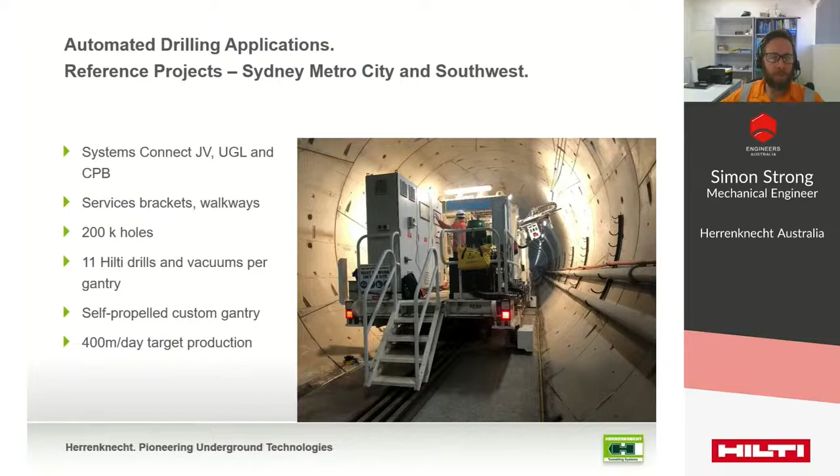Systems Connect had a desire to further advance the drilling system automation. The impetus for this vision was to increase productivity by eliminating some operator decision-making. One of the required features was automatic advancement of the gantry, which in road mode also included autonomous steering.

Another major requirement for the drilling rigs was to align automatically with string lines on the tunnel wall. To make this work, the drill units were equipped with industrial cameras which would take an image of the tunnel wall, recognise the string line, and move the drills to a measured radial distance to place the drill bit directly on the chalk line. The photos were displayed to the operator with an overlay of the hole pattern so that the operator could quickly respond to any obstructions.

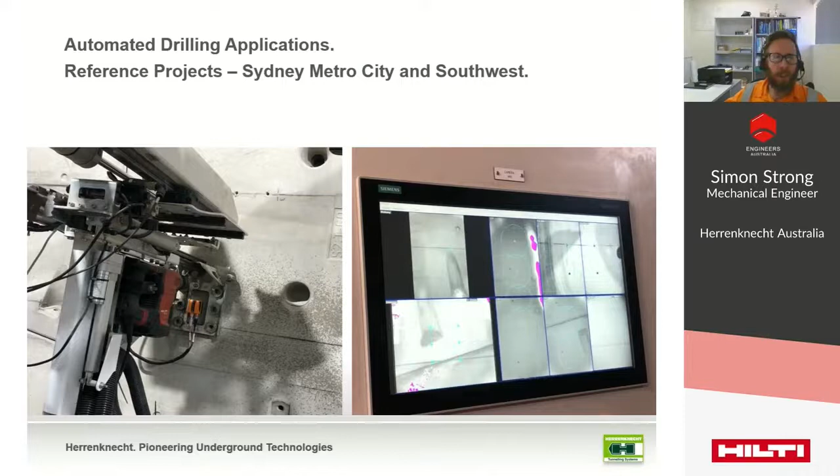The following slide shows a short video of the drilling rig in action. During this drilling cycle, the operator is preparing the other drilling units to commence their cycles also. There it goes.

The orange device on the side of the drilling bracket is the camera. You can see the wobble in the drill bit, which explains why we need the bracket at the front of the drill rig to help guide the drill bit to give us an accurate position.

The tolerance required for the dimensional accuracy of holes in any given bracket was about plus or minus 1 millimeter, which is a tight tolerance for a hammer drill.

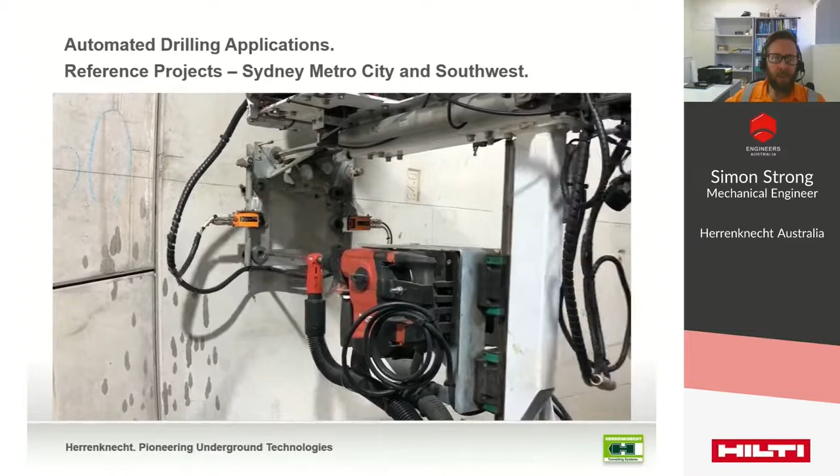So the rig has completed its automatic cycle, and then returns to a home position to be moved to the next position.

These three tunnel fit-out examples showcase the significant benefits of automated drilling. High productivity can offset the equipment capital price, and by improving quality and safety, we can achieve key project and technical requirements with reliable consistency.

With many upcoming major infrastructure projects across Australia, we expect to see a lot more automated drilling. I see the potential for continued advancement of the drilling technology. A practical convenience that I can think of would be automatic marking of failed holes, which is typically from a rebar strike.

Another great advantage for future technologies would be electronic data logging and shift reporting, which would help engineers and project managers stay on top of the productivity. Drilling rigs can also be utilised to assist with the anchor and bracket installation processes, adding value by assisting activities after drilling.

So this wraps up my discussion this morning. Thank you for your attention. I'll conclude here, and I hope you've found this interesting and informative.